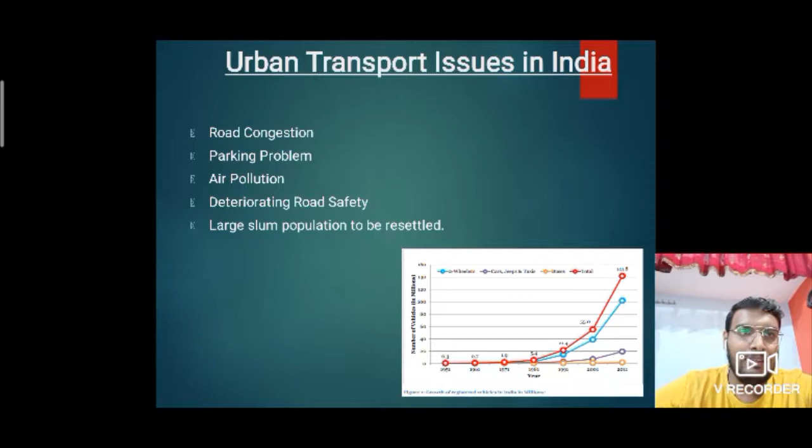Now, coming to the challenges to urban transportation.

First, gap in law and regulation. There is no legislation at center, state or local level that comprehensively covers urban transport requirements of Indian cities. The current system of law, regulation and governance for urban transport is a legacy of an era when Indian cities were sparsely populated and had not yet witnessed the kind of transport problems they are encountering today. Many acts in place today are a legacy of the British Raj, and a few of these have evolved to address specific issues in urban transport, resulting in fragmentation or overlap of jurisdictions.

Distorted land market affecting transport infrastructure development, with very high cost of land acquisition. This is a time consuming process as well as a major barrier for transport planning of integrated urban transport infrastructure. About 70% of delays in all infrastructure projects in 2008 were due to problems related to land acquisition.

Comprehensive design standards for transport infrastructure are lacking. This problem is common with the design and standards used in our country. We are just trying to give tenders to smaller contractors, and we are not giving much emphasis on the design standards for how they are going to build the road for us.

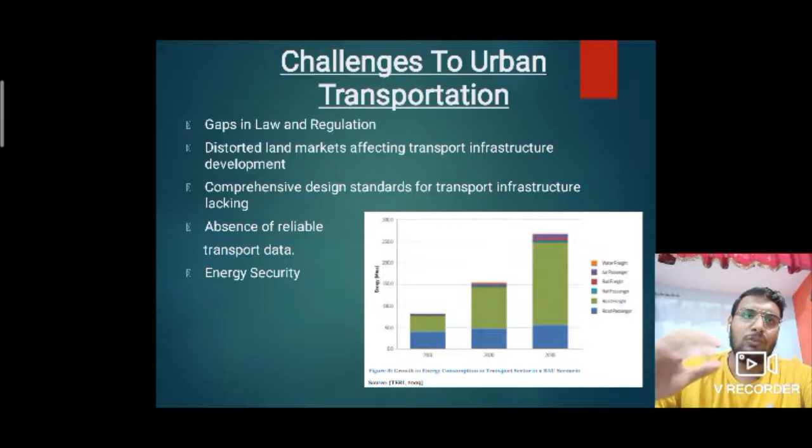Energy security is again a major concern for a country like us. The production of crude oil in the country has increased at an average annual growth rate of 1.6% from 2000 to 2010, whereas consumption of petroleum products over this period has increased at a rate of more than 4% annually. The reserve-to-production ratio of crude oil in India indicates enough reserves for 30 years, whereas this ratio worldwide indicates enough crude oil to last for 46 years. India has become, and will continue to be, increasingly dependent on imported crude oil if necessary steps are not taken quickly. This graph shows how we are increasingly using crude oil and petroleum related products in our country.

Third is the door-to-door approach, which generally means people should reach their destination in very less time and in an easy way. Fourth is traffic management or road safety, which means the number of chances of accidents should be minimized.

Fifth is demand management, which generally means the designed urban transportation system should be used by most of the people of the city. Next is coordination among fragmented institutions, meaning the designed urban transportation system should have routes that include most of the fragmented institutions of the city. And the last one is increasing financial mechanisms and resources.

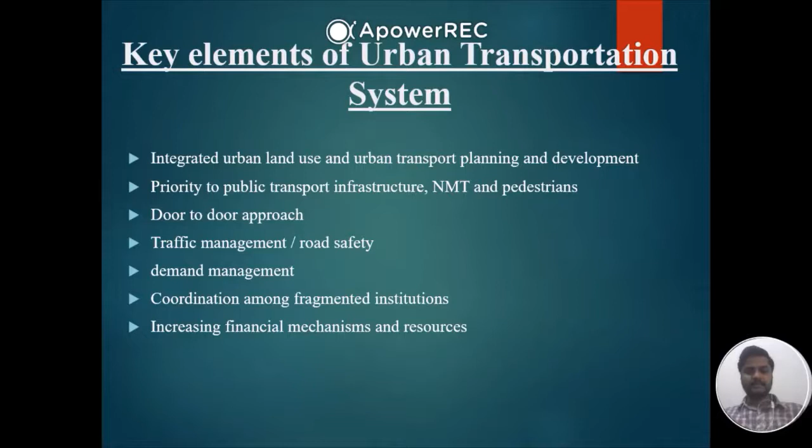Now we are going to discuss Janmarg. If we talk about urban transport planning systems, we can't avoid the case study of Janmarg, a metro experience on road through technology innovations. Janmarg is also known as Ahmedabad BRTS. BRTS generally means Bus Rapid Transit System, and this design was proposed by CEPT University in 2008.

These are the various aspects of the case study: bus design, bus station access, access to bus, junction management, integrated transit management system, automatic fare collection, automatic vehicle location, and passenger information system. All these three come under the integrated transit management system - a new integrated transit management system. Now let's discuss more in detail about these aspects.

Let's first talk about bus design. Bus design has limited capacity with the manufacturers. Bus is designed into three categories: low floor, semi-low floor, and high floor.

Low floor has a height of 380 mm, with high capital cost, high operating cost and inefficient movement space inside the bus. The semi-low floor is 650 mm height, with moderate capital cost and inefficient movement space inside the bus. The high floor is 1150 mm height, with a high station floor, longer ramps leading to higher station cost, and constraints on station location.

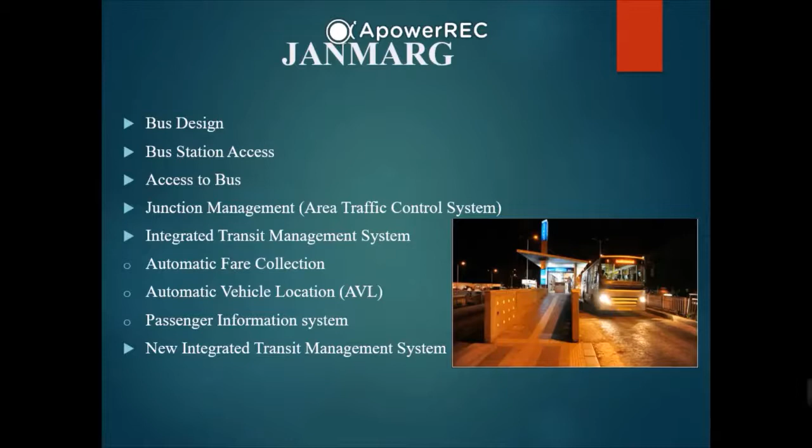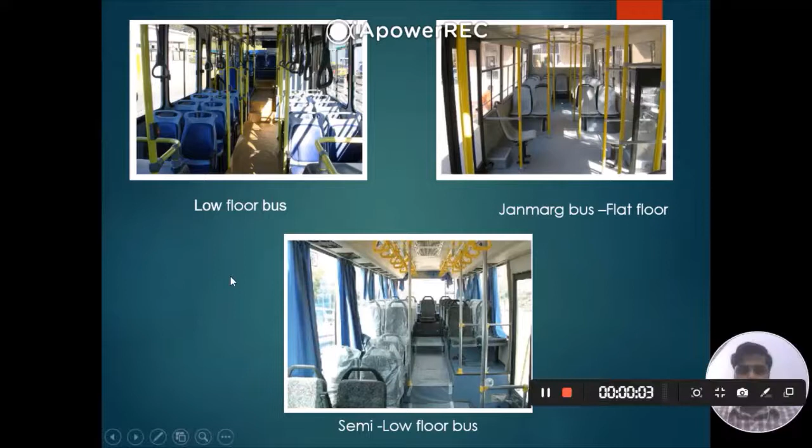The RFID reader and RFID tag should both be aligned in the same line so that it can sense properly. Each BRT station has 2 doors on each side, and the same system is followed on the other side of the BRT station.

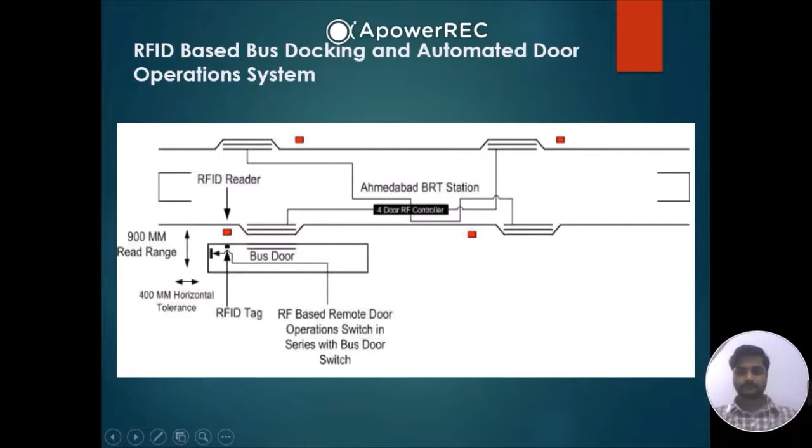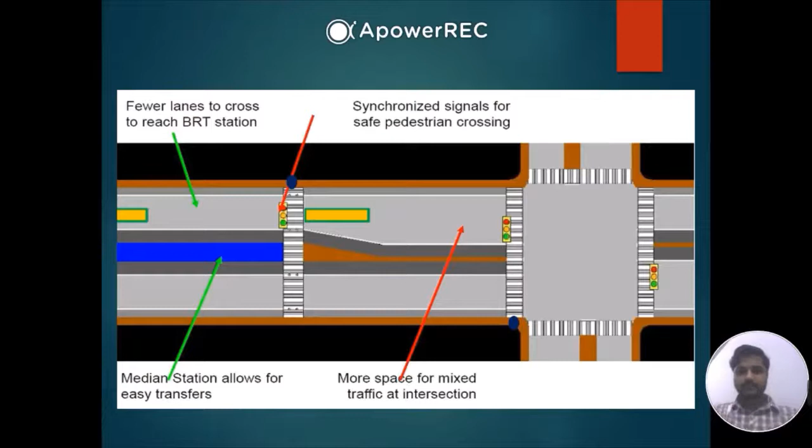In this slide we are going to look into the lane distribution near the BRT station. As we see, these 2 lanes are provided to cross to reach the BRT station, and here this is the synchronized signal providing for safe pedestrian crossing. This blue cross section is the BRT station, which is a median station, allowing for easy transfers. As we notice, this blue cross section, as we go further from this BRT station, decreases, and this lane goes on increasing, meaning this lane is providing more space for mixed traffic at the intersection. From here now Vernit will take over.

Hello everyone. My topic is World Bank engagement in urban transportation system. So what is World Bank? World Bank is an international financial institution that provides loans and grants to low and middle income countries for the purpose of pursuing capital projects.

World Bank has been a major investor in the transportation sector in India. At present it has around 10 projects, including 7 state projects and 1 each for national highway, rural road, and urban transportation, with a total commitment for the transport sector in India as of June 2011 of around $5.9 billion spread across 14 projects. In India, it is estimated that for the next 10 years there will be around $500 billion investment from World Bank in the transportation sector.

Its basic objective in India is to help India develop an urban transportation system that provides access and mobility for all. It provides a transport system which is clean, safe, and economically sound. It not only promotes development of the country but also of the people. The services it provides should be affordable to end users as well as the government.

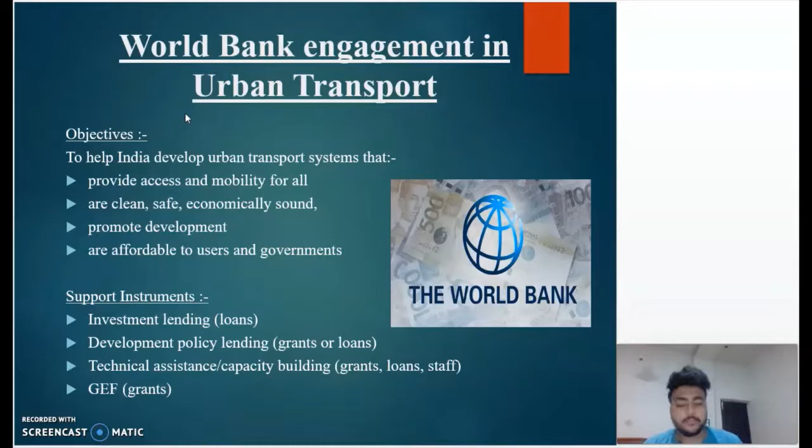Now, what are the World Bank's priority areas of support? These are basically the most important areas of support. One, its main aim is to provide public transportation infrastructure, services, and regulation for all. Point two, it also ensures sound traffic management policies and its instruments.

Point three, World Bank not only ensures motorized transportation facilities but also extends help towards non-motorized transportation facilities such as sidewalks and bikeways. Point four, it also ensures integrated urban land use and transportation planning. This is a very broad term which involves consideration of economic, environmental, and social factors, and also involves broad stakeholder participation.

Point five, it also helps in planning for major urban transportation investments, which consists of: A, consideration of alternative land use impacts; B, improved travel demand and traffic analysis; C, calculation and evaluation of environmental, economic, social, and financial impact on a country; D, financial instruments and capital investment programming.

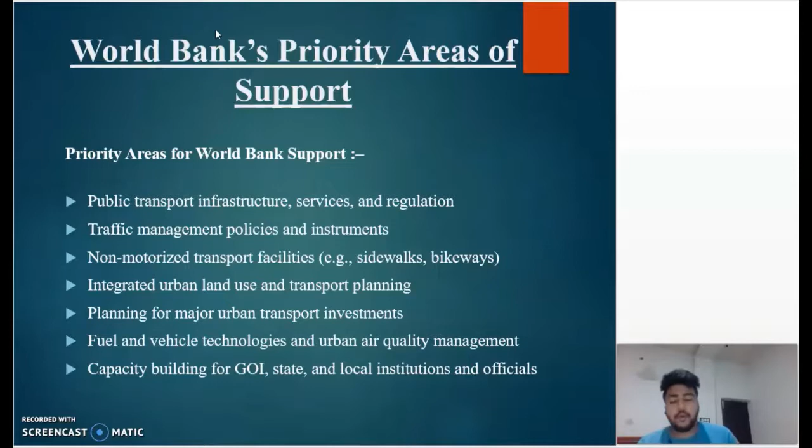Point six, it ensures fuel and vehicle technologies and urban air quality management are up to international standards for all countries. Point seven, it also ensures good capacity building for GOI, state, and local institution officials to aid in development activities.

Now we come over to examples of World Bank's efforts in India.

Mumbai Urban Transport Project.

Mumbai is India's commercial and financial center and one of the most densely populated cities in the world. The city heavily relies on public transportation, with about 80% of all motorized trips undertaken on public rail and bus services. World Bank, since 2002, has supported Mumbai's efforts to plan and develop its infrastructure.

The first Mumbai Urban Transport Project increased the number of suburban trains and introduced more comfortable and ventilated coaches in railways. It also improved east-west road connectivity and ensured a good modern traffic management system at key congestion points, covering around half of the city, as Mumbai is very packed in terms of traffic.

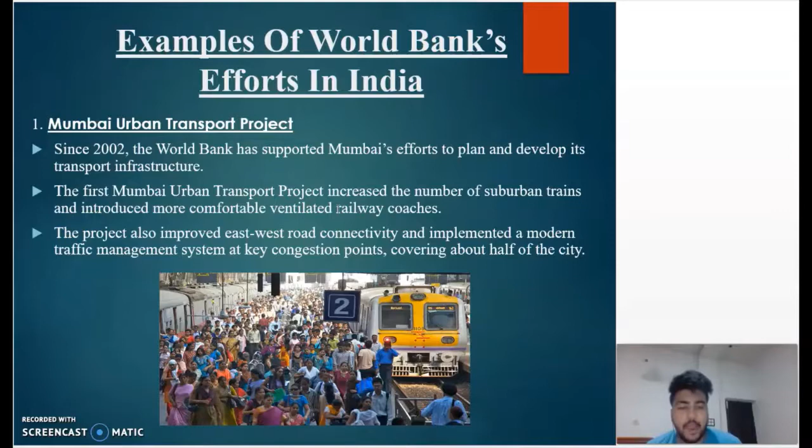Another example of World Bank effort: World Bank signed a 147 million loan agreement to improve urban services in Jharkhand. This loan aims to improve water supply, sewerage, drainage, and roads, and strengthen the capacity of Jharkhand in urban infrastructure. This agreement was signed on June 24, 2019, has a grace period of around 7 years, and a final maturity of about 22.5 years.

Another loan agreement was signed between World Bank and the Rajasthan State of India. Under this, a 250 million US dollar loan was given to support the development and management of Rajasthan's state highway network. It was signed on June 27, 2019.

The main focus of this project was to support the construction, upgradation, improvement, and maintenance of around 766 kilometers of state highways and major district roads. It also focuses on enhancing road capacities, road qualities, and institutional capacities to manage the strategic network of the state through operationalization of the state's road network.

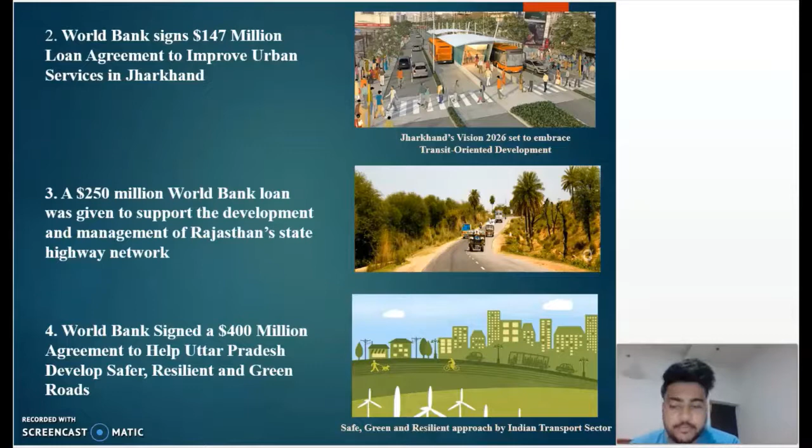Now we come towards the conclusion of this presentation. It has become very clear that massive urbanization and transportation problems will be one of the mightiest challenges that India might be facing in the near future, because of its ever and fast-growing population.

So for an urban transportation solution to be effective and efficient, it has to keep hand in hand with urbanization. One thing our governments can do to promote mass mobility is to ensure an efficient public transportation system and encourage commuters to opt for public transportation modes rather than private vehicles for better traffic management.

Another characteristic of urbanization has been the growth of satellite towns. Laborers coming from sub-urban as well as rural areas have been moving towards the cities for better employment opportunities, which has been creating an absurd amount of different traffic issues that need to be corrected efficiently and effectively.